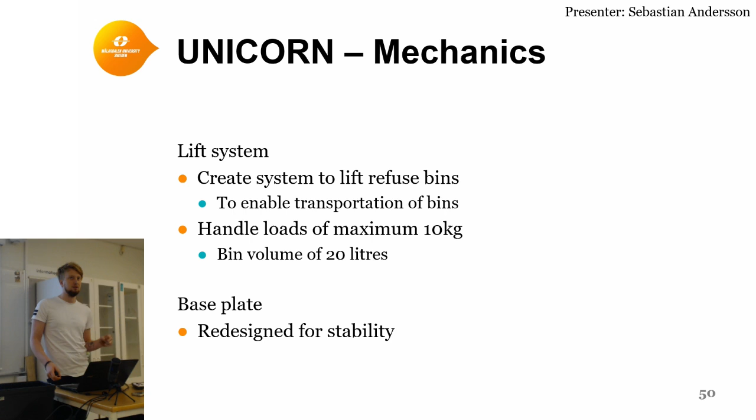The defined maximum payload for Charlie is 10 kilograms, but testing shows that we can at least lift 15 kilograms. Another mechanical achievement is the base plate, which has been substituted from a very thin and wobbly one to a thicker and more robust one.

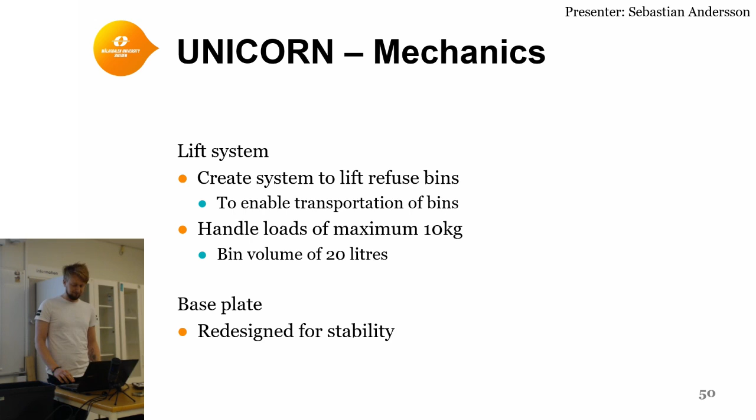So the lift system has three main areas: the mechanical motion, the hardware, and the software. For the mechanical motion, we have linear motion to be able to actuate it in two axes. The hardware is basically controllers for the motors and the microcontrollers. And for the software, we use ROS in combination with the Arduino IDE for communication.

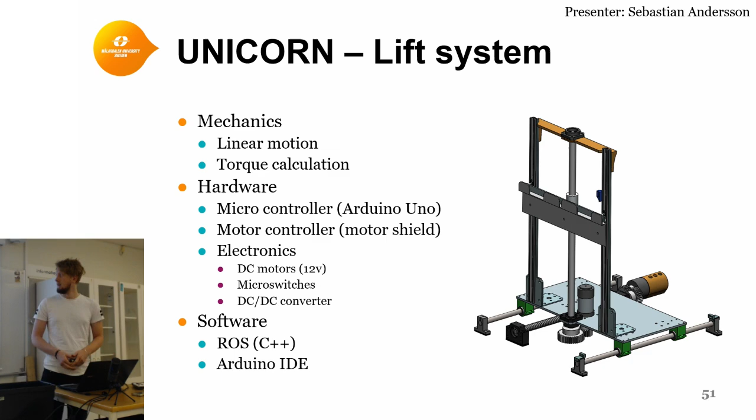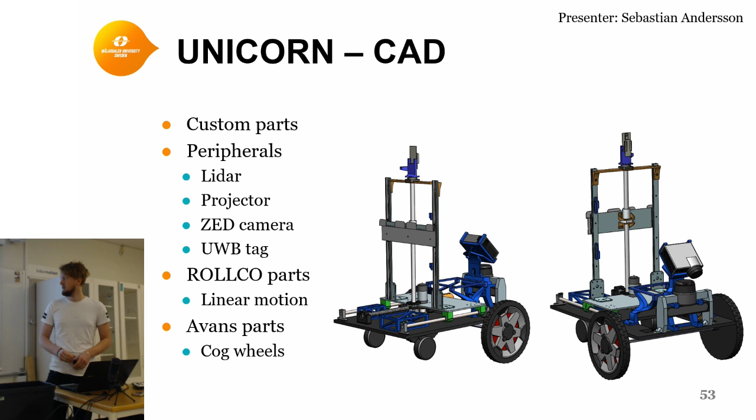The parts that have been added to Charlie, as well as the entire lift system, have all been constructed and modeled in SolidWorks. Mainly we have custom parts, which include all of the mounting for all of the sensors and peripherals. We'll also have the actual peripherals modeled, designed to look as similar as they do in real life. And also we have the Rollco and Avans parts for the linear motion and the cog wheels, but they have been provided in an already completed format.

Here's a quick show of some of the mountings that we have for the peripherals, where we have the projector mount, which also has a screwing option that can tilt the entire projector to provide different angles for it.

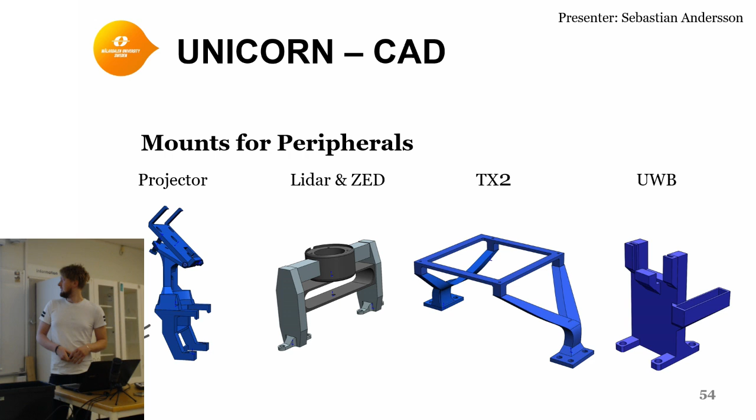Rollco, which is one of our sponsors, has provided us with very high efficient linear motion products. These are the C-rails, which are important for us in vertical orientation when we lift off our bins. The ball screws are transmission for power between the motors and the motion. And we have bearings and ball bearings for smooth motion for the entire lift system to move on Charlie.

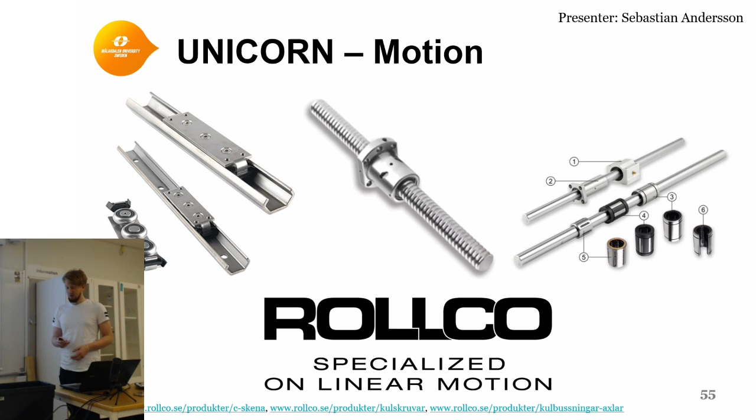So for the lift system, we have the linear motion in the horizontal and vertical direction. To provide that motion, we have used two motors to drive the lift system into the proposed direction.

Variation of weights in the bin affects the execution time of the motors and the speed of the motor. To solve this problem, four microswitches are used and are located at different positions on the lift system to start, stop, and change the direction of the motors.

The picture shows the connection between the hardware that are used in the lift system. The power distribution board cannot generate the desired voltage for the motors. Because of this, we use a buck converter to deliver the voltage that the motors need.

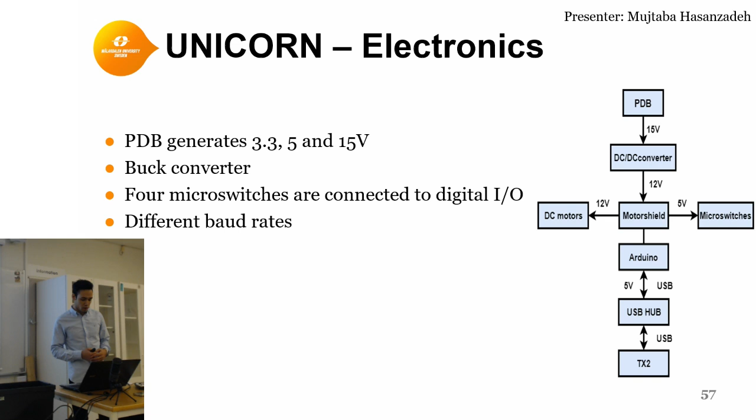Arduino together with a motor shield controls the motor, sends data to the main computer TX2, and also reads data from the microswitch through digital I/O pins. The baud rate depends on how much data is received and transferred. In our case, since it's not that much data, a low baud rate works very fine.

In order to communicate with the main computer, two nodes are created, one in the TX2 and one in the Arduino. Each node has its own publisher and subscriber, and both publish and subscribe in the same topic. When the ROS master is running, as soon as the node in the TX2 becomes activated, it sends a message to the lift system, and when the lift system gets that message, it sends an acknowledgement back to the main computer and starts to operate. When the lifting is done, the lift system sends another message to the main computer that lifting is done, and Unicorn can start to move further.

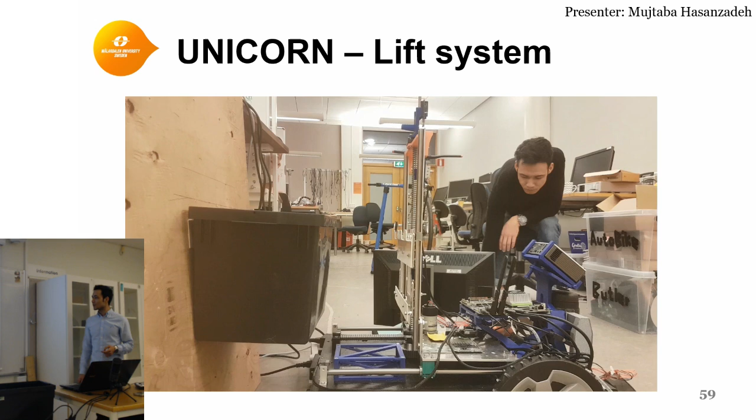Here we have a short video on how the lift system works. It received the message.

The motor changes direction or stops when the microswitch is pushed.

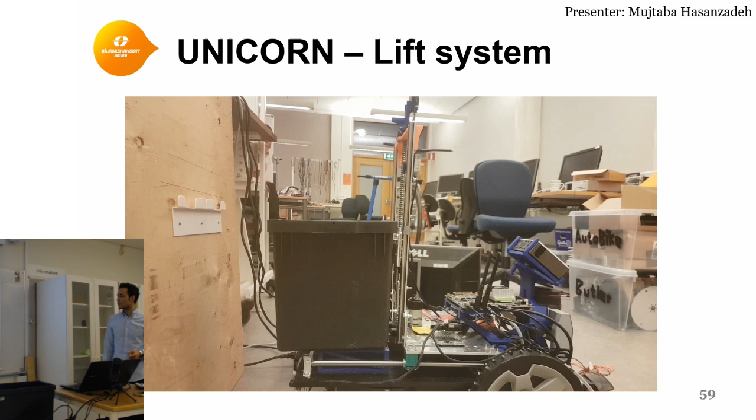One of the main goals with this project, as mentioned by Ulrik, is to accurately locate the robot in the environment, and send this information to our control tower, which is responsible for giving further instructions to these autonomous vehicles. This is why it's very important that we have a robust communication channel between the control tower and the robots, and this is where ultra-wideband plays an important part.

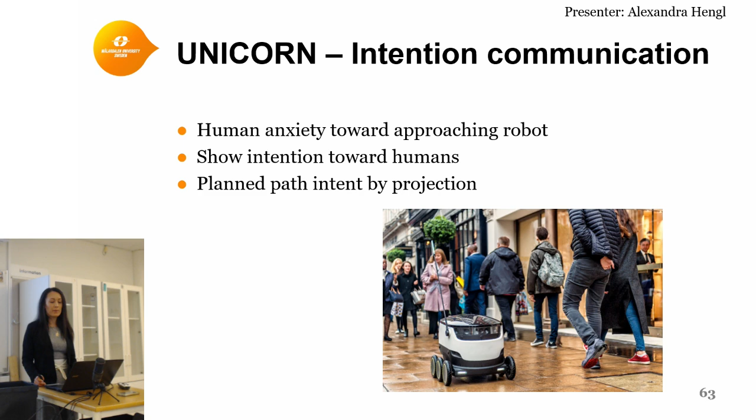Robot intention communication can be called any method that gives humans awareness about what the robot is planning to do. This issue is important because moving robots can be quite intimidating for humans, raising their anxiety levels. Research shows that robots that can communicate their intention towards humans lower anxiety and provide a more efficient collaboration. The Unicorn project includes freely moving robots that will potentially cross paths with humans on the streets. Therefore, we implemented a method to communicate the robot's intended path.

The method we took is to project the robot's moving direction in front of it. To show where the robot is going, we first need to extract the data used to set the direction. In ROS, this is called the twist message, which controls the odometry.

If we read these messages, then we can extract the robot's speed and its turning direction to show an appropriate projection. There were some challenges with this method during implementation.

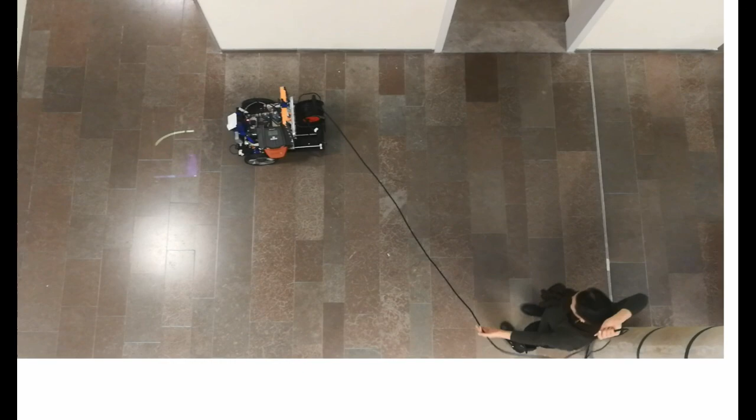This is not important—it's because when we filmed it, it was not full screen. Huh? No, the projection is important. That little thing was not important. Shut up.

To share the same workspace for human and robot, the robot must be able to create a collision-free path from its start position to reach the destination. So we need a path planning module for that. This module creates an optimal path by minimizing the computational time and distance covered by the robot, and avoids static and dynamic obstacles.

The navigation module has 2 parts: one is the global path planner and the other is the local path planner. The global path planner operates in a known environment and avoids static obstacles, whereas the local path planner operates in an unknown environment and avoids dynamic obstacles.

Last year's project implemented the ROS navigation stack, where the global path planner was Dijkstra and the local path planner was Timed Elastic Band. This year we decided to change the global path planner from Dijkstra to Theta star.